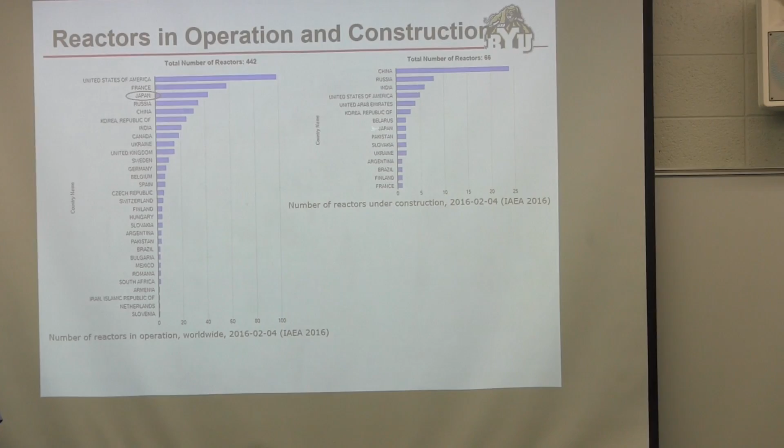This is being challenged in legal battles, and has been for a long time. But if Finland ends up having to foot the bill, it will bankrupt the utility in Finland, which would revert back to the government of Finland, which would probably bankrupt the government too. And if Areva ends up footing this bill, it will bankrupt Areva, which probably won't bankrupt France, but will have a huge negative impact on France. These are the things that make it so hard to get people to invest in stories like this, and there are lots of those that make it hard to invest in nuclear power.

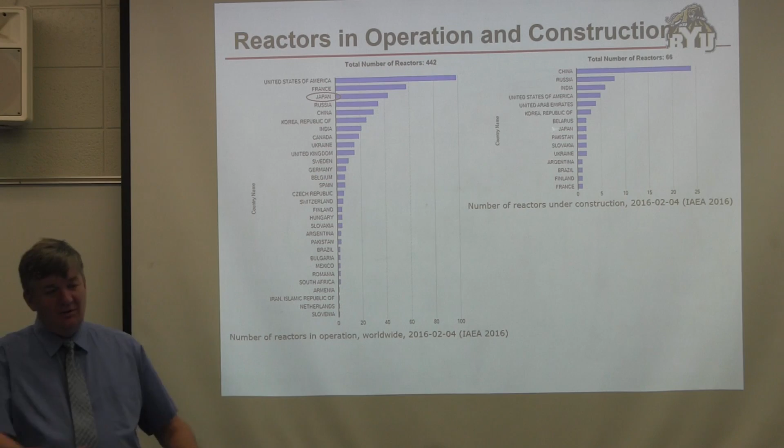So given this, who produces the most nuclear power in the world? Well, the U.S. This is the fraction of power produced from nuclear - in terms of fraction of electrical power, France produces the largest percentage from nuclear, almost 80% of their power comes from nuclear energy, so that's a lot. You can see how the rest of the countries come down here. There were a couple of countries where this was 100% for a while, but they closed those reactors.

These countries now have 0%. Where was Japan like 5 years ago? Japan was probably about second or third on this list, so it was a fairly significant amount of their power. That's why I circled here. Now it's down to nearly 0%.

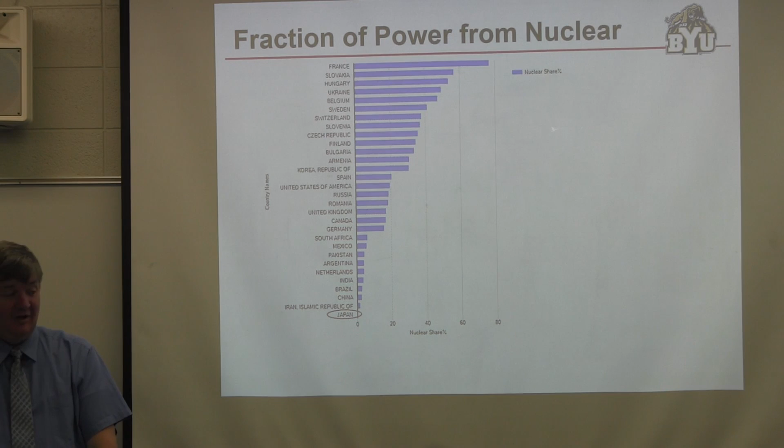So what's it going to? Down to coal, mainly. Well, basically everything they could find, but coal was the biggest contributor, and they're still struggling with that. They don't have a stable energy policy in Japan right now. Nobody believes they can continue what they're doing right now for very long. So they've got to either come to grips with restarting these nuclear reactors, which is very unpopular among the people in Japan, or convert to something else.

Now in terms of actual generation - this is suppressed - the U.S. on this scale is at 798, and France is at 419. That's so far out here that everything else would look like zero. So the U.S. generates nearly twice as much energy from nuclear power as France, and France generates about twice as much as Russia, and then everybody else follows as you can see here. So the U.S. is by far the largest generator of nuclear power in the world.

France has the largest percentage of nuclear power contributed to electricity. Russia is a large nuclear power contributor, and you can see where the rest of the countries fall in line. Japan - we circled them. This is the amount of nuclear generation in Japan.

I noticed China's building a lot of reactors - how long before they catch up to us? China's economy has been exploding for a long time, though it's slowed down to roughly 7% GDP growth right now. Compare that to the U.S. GDP growth, about 1.5%. So China's economy is growing at 7%, and they think they're in a crisis right now - and they probably are, frankly.

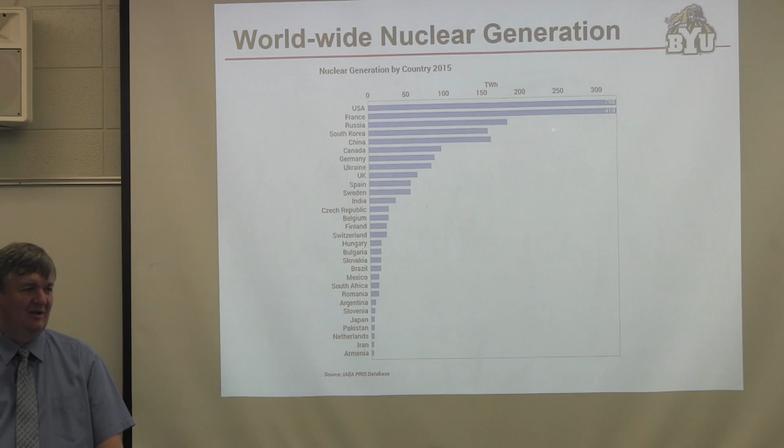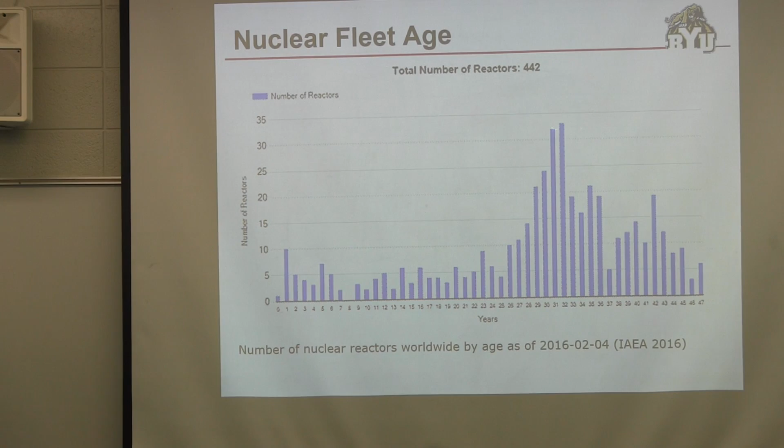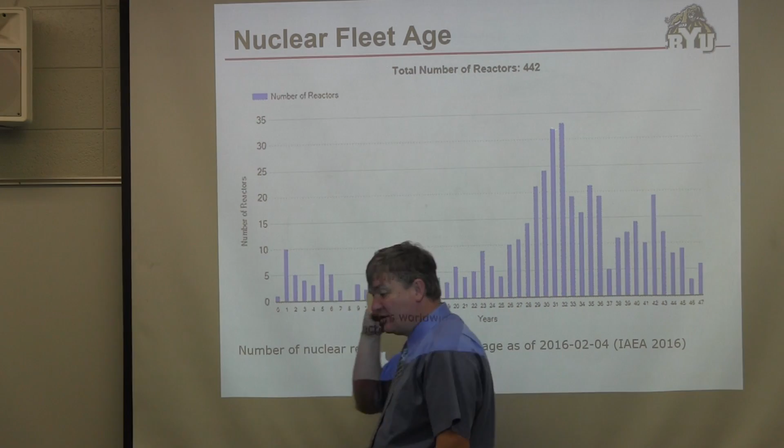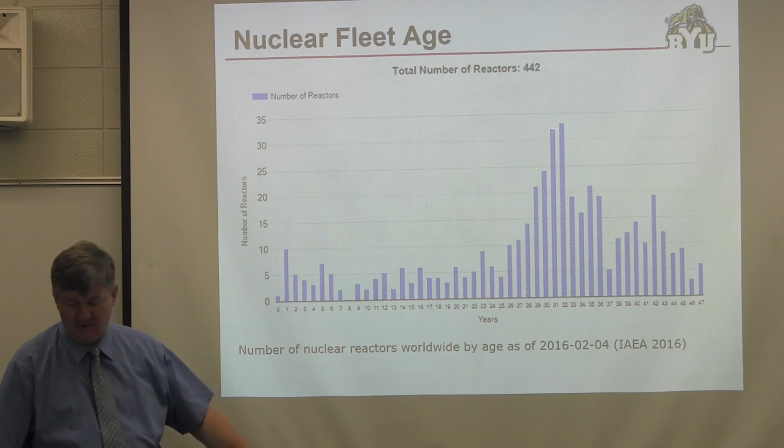So they're mostly 1970s technologies, designed in the 1970s, built in the late 70s and 80s, and up into the early 90s. There hasn't been zero construction since then, but worldwide there's been a lot less construction of new nuclear power plants since. Chernobyl was really what caused this, and Fukushima probably had a similar effect.

All right, so let's talk about how they work. First, some terminology. Fission is the dissociation of a nucleus into two unequally sized major fragments and a number of neutrons and some gamma rays typically. A fissile fuel is a fuel that fissions upon absorption of a neutron. All fission reactors have to have either fissile fuel or fertile fuel.

Nuclear power always comes from fissile fuel. Examples are uranium-235 or plutonium-239, the two most important examples. But there are some reactors—actually all reactors—that produce some fissile fuel from fertile fuel. So you put fertile fuel in them, and a fertile fuel is something that becomes fissile when it absorbs a neutron. So there's no fission event, but you absorb a neutron and convert U-238 to plutonium-239, and plutonium-239 then undergoes a fission event.

There are no such reactors in commercial operation right now, but thorium-232 is probably the next most important fertile fuel that people are thinking about using for nuclear power.

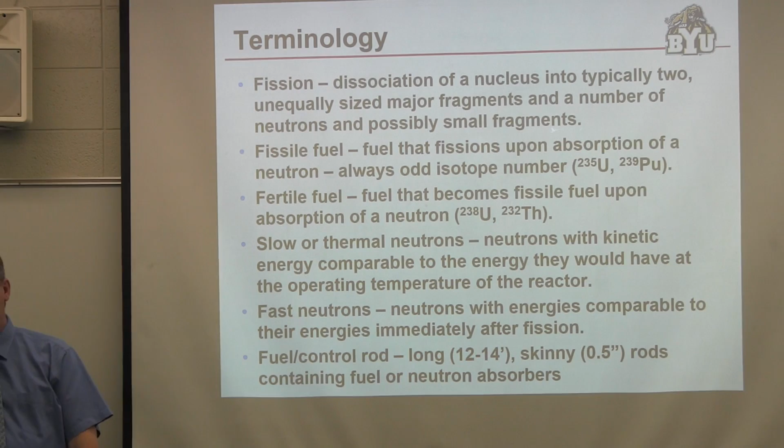When these nuclei come apart, we talked about how energetic it is. The fragments of the nucleus move at extremely high velocities, and the neutrons themselves move at very high velocities. They measure these velocities traditionally in electron volts, and a typical neutron from a fission will be what we call a fast neutron—it has a lot of energy, on the order of 1 to 3 mega electron volts. In extreme cases, they get up to 7 or 8, but those are rare neutrons.

And like many things in nuclear energy, everything is kind of backwards from what you usually understand. In normal chemical kinetics, it's the rapidly moving molecules that react. It turns out in nuclear power, it's the slow-moving neutrons that are most responsible for the reactions. In fact, the rapidly moving neutrons don't cause much to happen.

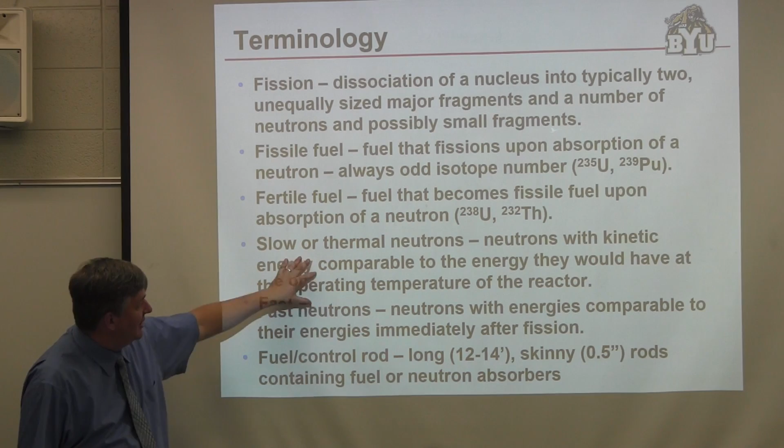So in a fission reactor—in a slow or thermal reactor, as they call them, which is most of the reactors we've built, almost all of them—what you have to do is slow those fast neutrons down so that they get to a little under 1 electron volt. So you're going from several mega electron volts down to less than 1 electron volt. Typically, 0.025 electron volts is the target you try to get them to. They call those thermal electrons, thermal neutrons, or slow neutrons. That's the level of energy they'd have if they were just bouncing around in equilibrium, bouncing off nuclei in the reactor, and that's where you try to get them to.

So the design of most reactors is to take the very fast neutrons that are initially generated and slow them down into slow neutrons. The thing that does that in the reactor is called a moderator. In most reactors, water is used as the moderator. So when you hear people say this is a water-moderated, water-cooled reactor, water is both cooling the core and also slowing down the neutrons.

The things you want to use for moderators tend to be very light things, but most importantly, they need to not absorb neutrons very effectively. You want neutrons to just bounce off the nuclei, exchange energy in that collision, but not be absorbed. That's the difference between heavy water and light water. Normal water, which has mostly hydrogen-1, has a higher absorption probability than heavy water. If you use heavy water, the likelihood of losing a neutron to absorption is much lower, so you don't lose as many neutrons. That means you don't need as many neutrons for the reactor to work, which is why you can use normal, natural uranium to fuel a reactor with heavy water.

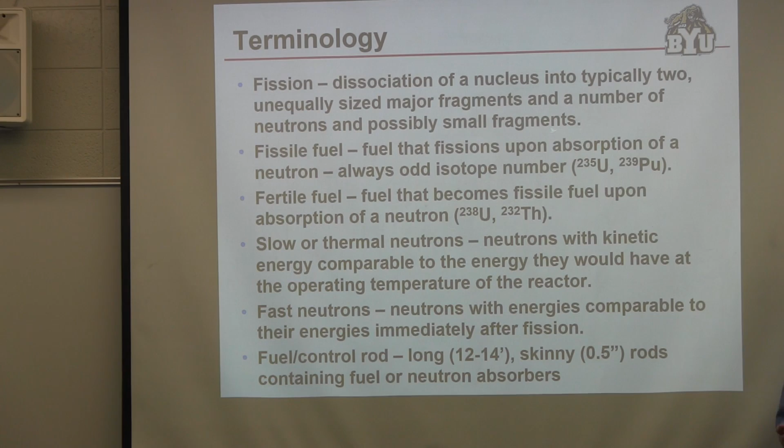Because you need a large surface area, since they get so hot inside that if you made them any bigger, they would melt in the core, and then you'd have a molten reactor, which is really bad from a safety standpoint. That's the worst thing you could do.

So you make them very thin, and one of your homework problems is going to be calculate the temperature profile on a typical fuel rod. You'll see they're typically about 1 centimeter, about half an inch in diameter, and across that 1 centimeter you go from several thousand degrees to just a few hundred degrees in a really steep temperature profile. So the fuel rods are really skinny.

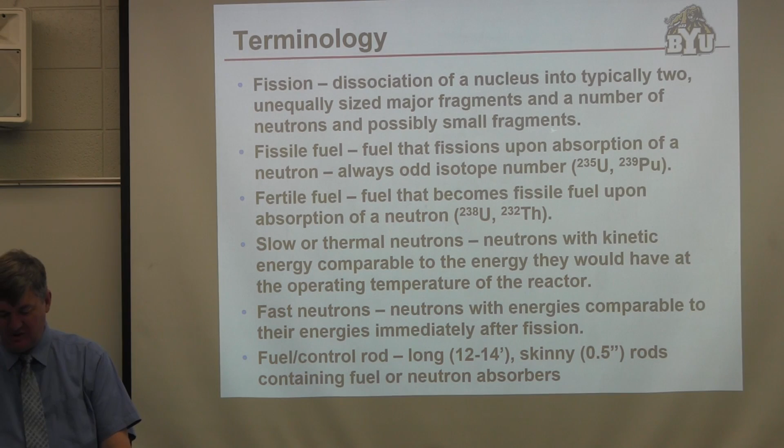The control rods are similarly skinny. They don't have to be skinny for the same reason. They're usually skinny because they go into the same kinds of holes that the fuel rods go into. They are actually sometimes a little bigger.

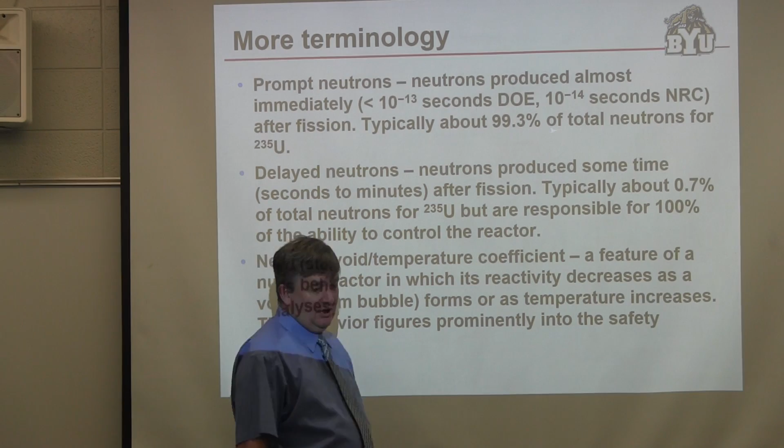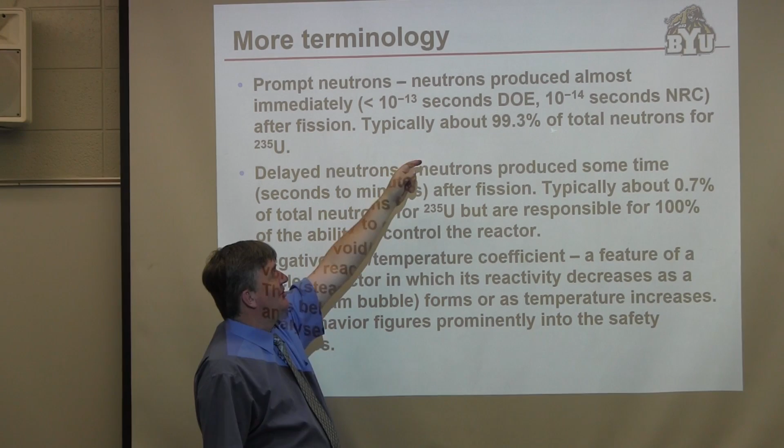When you generate these neutrons, you generate what they call prompt neutrons, and this is more than 99% of the neutrons, generated almost instantly. It turns out two different agencies of the government, both of whom have significant influence in the nuclear industry, have different definitions for what a prompt neutron is, but they're functionally about the same—essentially instantaneously generated neutrons. Neutrons generated in less than 10 to the negative 13 or 10 to the negative 14 seconds after the fission event are called prompt neutrons.

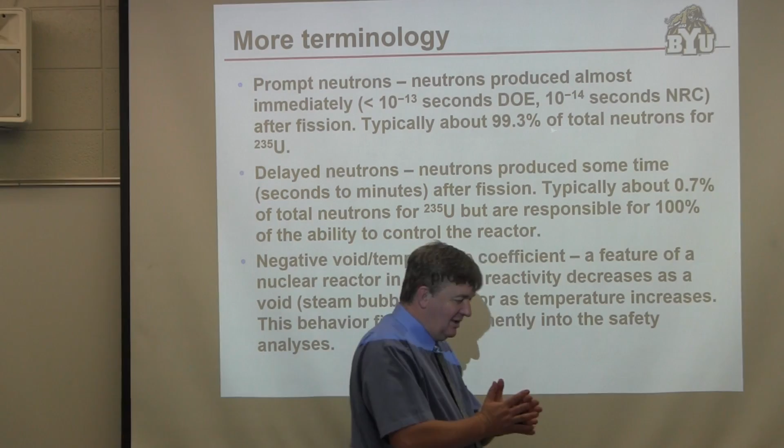So think about this for a minute. If I have this prompt neutron, I'm generating neutrons, and I've got this set up so I have a chain reaction, generating just as many neutrons as I need to keep it going at a steady state. What happens if I have just slightly too many, and they're being generated every 10 to the negative 13th or 10 to the negative 14th seconds? That means if I have slightly too many, that chain reaction, even if the reactivity ratio is like 1.000001, in one second you go through 10 to the 13th generations of accumulating neutrons.

So in less than a second, the reactivity of this reactor would just blow up—way faster than anybody could respond to try to turn the reactivity down. Or the other way, that's catastrophic. The other way isn't catastrophic, but it's still just as difficult on the reactor. If you don't have quite enough reactivity, the reactor just shuts itself down. Both of those things would happen effectively instantly, in terms of the time human beings can react to them.

Fortunately, there are delayed neutrons, and these represent less than 1%, typically 0.6 to 0.7% of all the neutrons. They aren't generated quite as quickly as the others—it takes seconds to minutes for these neutrons to be generated. Actually, the neutron generation itself is virtually instantaneous, but it occurs during beta emissions mainly. There are a few fission products that decay, and during their decay they generate more neutrons, but it takes a few seconds to maybe a minute for them to decay.

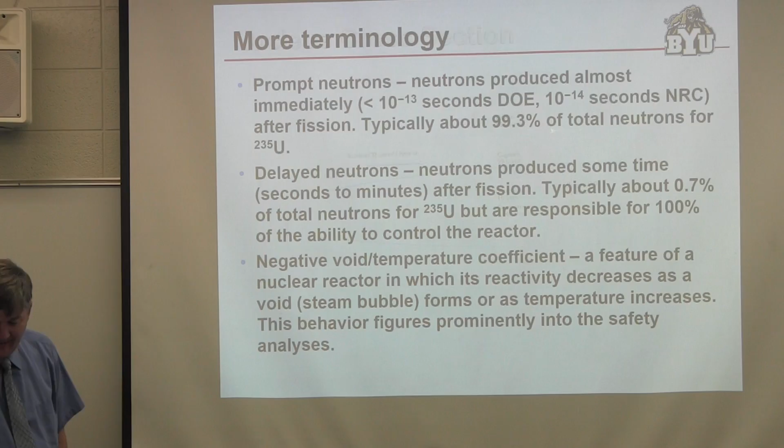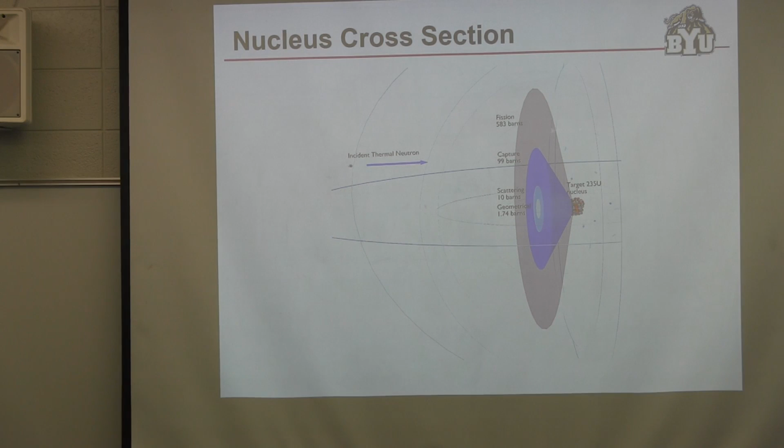So one more thing to talk about is the cross section. If this is a uranium-235 nucleus, we talk about cross sections—for absorption, for fission, for collisions, and for everything else. The cross section describes, from the standpoint of a neutron being absorbed, how big this nucleus looks. It's a measure of area, and the technical term for it is barns—like the side of a barn. Most nuclei are 1 to 2 barns in terms of their physical cross section.

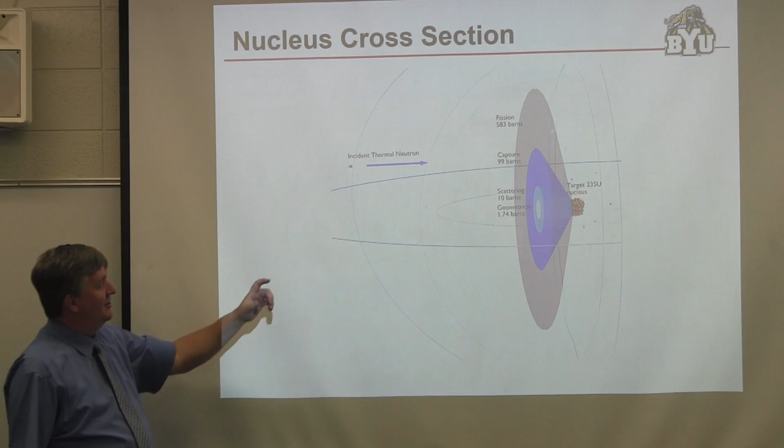But if an incident thermal neutron—a slow neutron—gets anywhere near this nucleus, it doesn't actually have to collide with it physically. The fission cross section is about 583 barns, which is a long ways away. If the neutron passes within that 583 barn target region around the nucleus, it causes the nucleus to fission. That's mind-boggling when you think about it: this neutron goes through here, far from the nucleus, and yet when it passes by, the nucleus fissions. That's part of the quantum mechanics of what's going on.

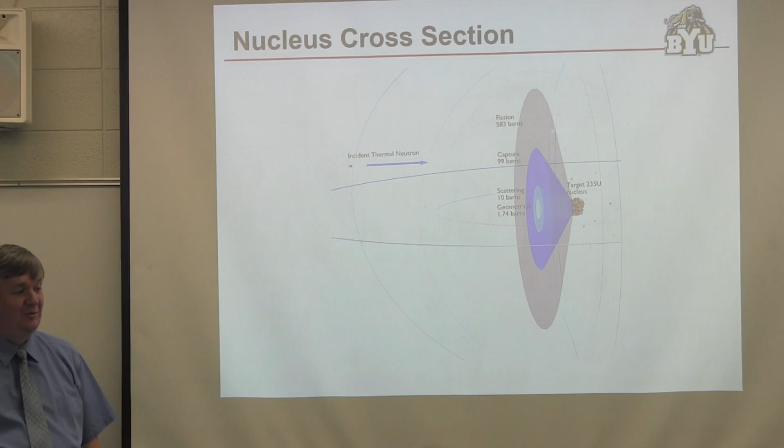Even though the nucleus has a physical size—about like this—it has an influence in terms of its wave behavior that's much larger, and it's so unstable that you don't have to get that close to it. If you think of this as a wave decaying as you move away from the center, the nucleus interacts with that wave far out here, and that's enough interaction to cause fission, even though geometrically they're still quite a large distance apart.

So this is how cross sections vary with the energy of the neutron. Notice this is a logarithmic scale covering 15 orders of magnitude—a huge range of variation. We start off at low energies, very low energies here.

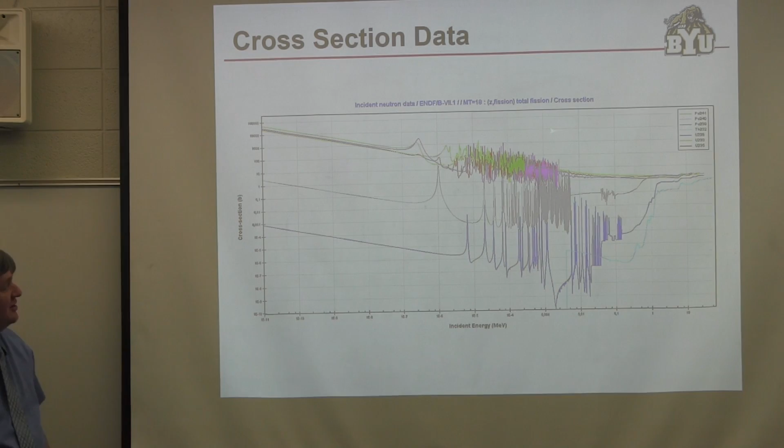We start with fission cross sections for uranium-235—the red line—plutonium-239 is the purple line, and uranium-233 is the green line. Those are all fissile materials, and at very low neutron energies their cross sections are over 10,000 barns. Remember, the physical diameter is only 1 to 2 barns, so you don't have to get very close to the nucleus to get it to fission.

But as the energy of the neutron increases, this decreases, and this may not look like much of a decrease, but these are orders of magnitude decrease. By the time we get up to the mega electron voltage, prompt neutrons are clear out here. So we are many orders of magnitude smaller in terms of the cross-section when these neutrons are moving rapidly than we are when they're slow.

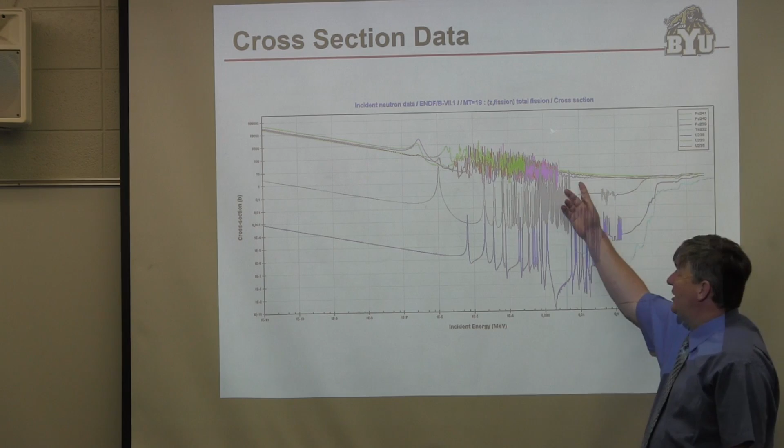So the design of slow reactors or thermal reactors is that neutrons are always going to be generated with energies that are out here, and we need some way to slow them down. As we slow them down, their likelihood of causing fission increases dramatically, and it's the slow neutrons that are actually driving the reaction in the system. So in reality, those neutrons spend most of their lives as slow neutrons.

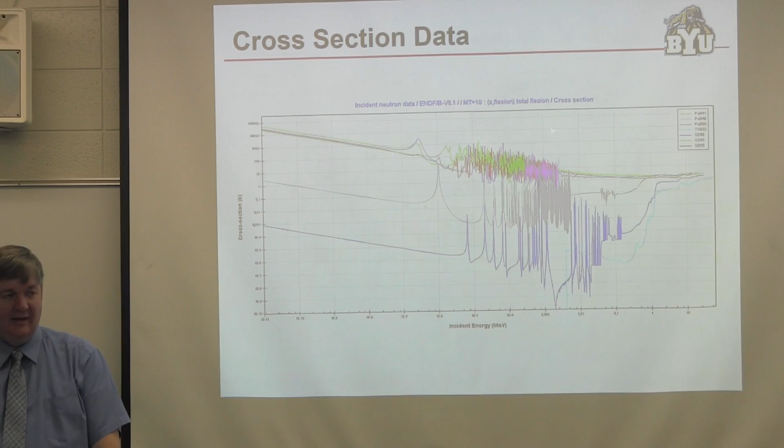This is a logarithmic plot, and this is a logarithmic plot. If you were to plot this on linear scales, this line would look like it would just come down like this and come out like this. So over the great majority of the lifetime of the neutron, it's actually moving slow. So we moderate - most reactors are under moderated.

So we have two kinds of reactors: thermal reactors, which is all but 2 of the 434 reactors we build, that operate on thermal neutrons, just the way I talked to you about. Fast reactors actually use those fast neutrons. They don't have any moderation. And so the cross-section of the fast neutrons is not 0.

And so they will actually fission the fissile material at high speeds. But that means you have to have more enriched material, because the effective size of those nuclei has shrunk way down, and the chances of it banging into something else and getting absorbed is increased significantly. So you lose a lot of neutrons to absorption instead of causing fission. So we usually try to get them down to well under 1 electron volt. They start off mostly at 1 to 3, sometimes up to 6 mega electron volts.

So fast reactors can be either breeder reactors or not breeder reactors. A fast reactor just means that you're using the fast neutrons. Almost always, if you build a fast reactor, you would make it a breeder reactor. So what a breeder reactor means is that it's generating more fissile fuel than it's consuming.

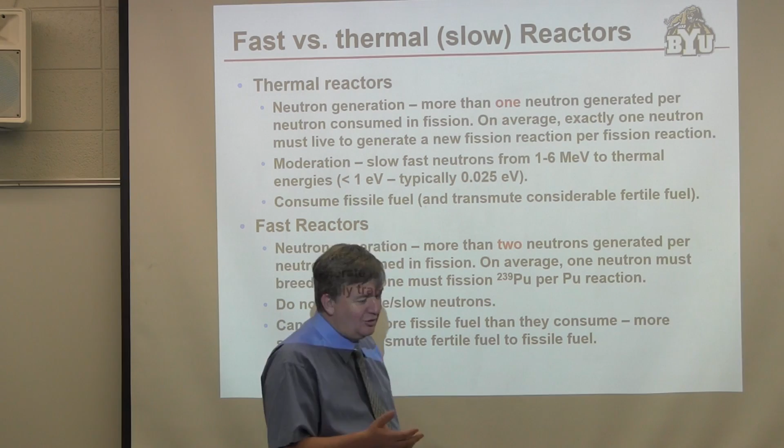So it's like an automobile that generates more gasoline. Now, you're consuming U-238 all the time, so it's not quite right - people say it makes more fuel than it consumes, and that's true in terms of the fissile fuel, but that's not true in terms of the fertile fuel. So you're burning up U-238, but you're creating more plutonium-239 than you're consuming, and over time, you have to take the material out periodically, take some of the plutonium out, put it back in the reactor, and it builds up more plutonium - you just keep making more and more fuel.

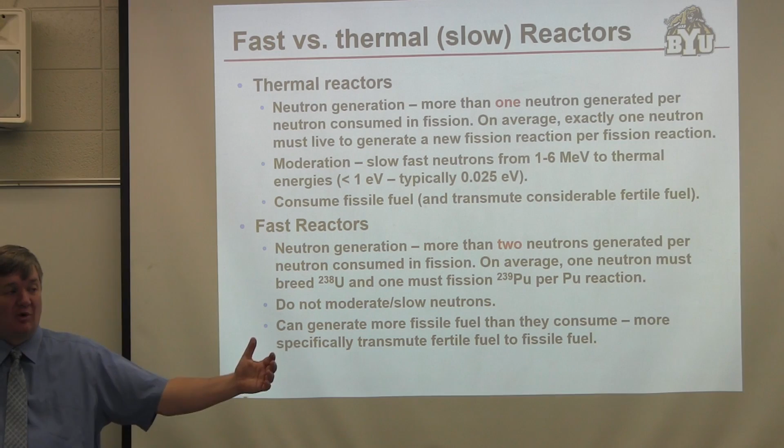So that means that instead of operating the reactors on the basis of U-235, which is only 0.7% of the uranium we have, we can now consume U-238 as well, which is 99.3% of the uranium. That makes the amount of fuel you need to generate a given amount of electricity way, way less. Or alternatively, that means we'd have way more fuel available to us for a much longer time than we would have otherwise.

So, with those terminologies, these are some of the parameters for different kinds of fuels. The vast majority of reactors are fueled with U-235, but mostly through weapons decommissioning, we have a bunch of plutonium. Plutonium goes into weapons, and so they mix that weapons plutonium with uranium oxide and make what they call MOX fuels - mixed oxide fuels, uranium and plutonium. But uranium is probably the place to focus here.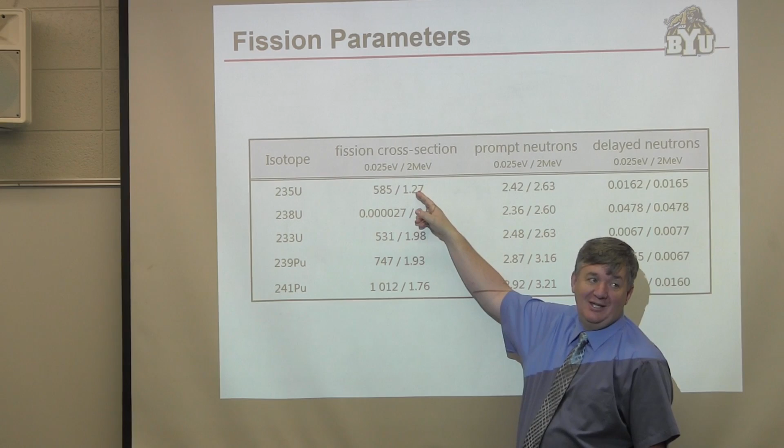So you can see the fission cross sections at energies of 0.025 electron volts - this is about 585 barns. That's only 1.27 barns at the fast neutron speed. So it's almost 500 times more likely to fission at slow speeds than it does at fast speeds. The number of prompt neutrons that you generate is a little over 2.

You only need 1 neutron to sustain this reactor, so you can afford to lose 1.4 of them to other things, in order to keep the 1 needed to keep driving the fission reaction. At high energies, you actually generate more prompt neutrons, and the delayed neutrons are a small fraction of that.

You can see the delayed neutron fractions there. You might think they're ignorable, but they are critically important to the operation of a safe reactor.

If you look at plutonium, it generates a little bit more. But now compare that to U-238, which is 99% of uranium. Look how much the cross section drops. You can fission U-238 both at low and at high speeds, but the fission cross sections are much lower. And you generate neutrons when you do that, and you actually generate more delayed neutrons.

So does that give you an idea? If you feel comfortable, you understand the science that's going on in the reactor? Because we're about to talk about the engineering of that.

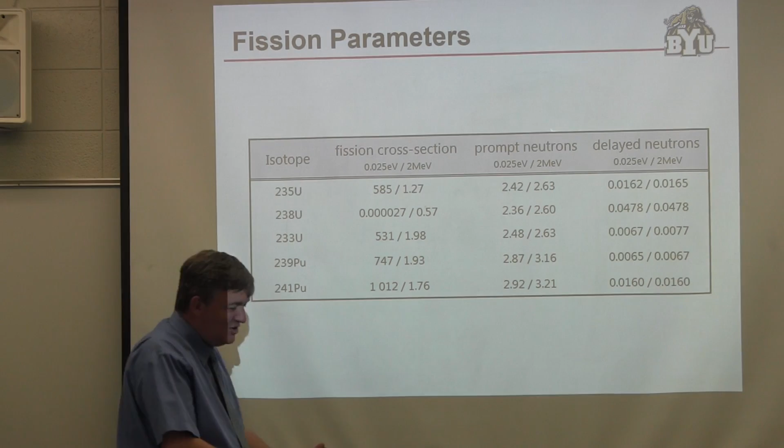Bottom line is, the reactor generates these very rapid neutrons. You have to slow them down, and there are several ways to slow them down. Then they'll react to produce more, and you have to keep the balance exactly right. So on average, even over a relatively short term, the reactivity—the ratio of the number of neutrons you're producing to the number you're consuming—has to be exactly 1.

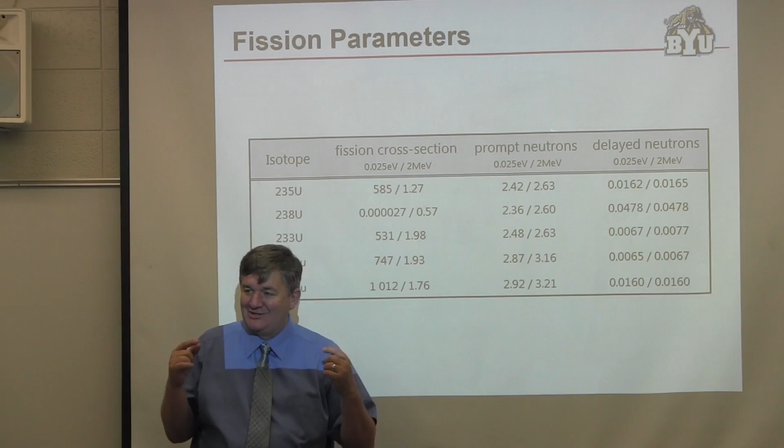The only way you can keep it exactly 1 is to be able to bounce up and down around 1 a little bit, and you do that with the delayed neutrons. They're the ones that give you the ability to respond in time so that you can keep the reactivity at 1.

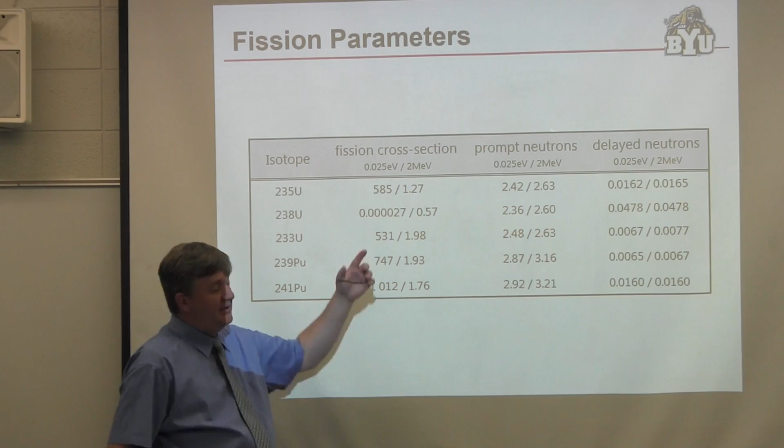So why exactly is the cross section so small for slow neutrons and U-238? The scientific reason is that U-235—it turns out that all fissile materials, this is just something interesting to know, have an odd number of nucleons. The U-235 is a huge atom.

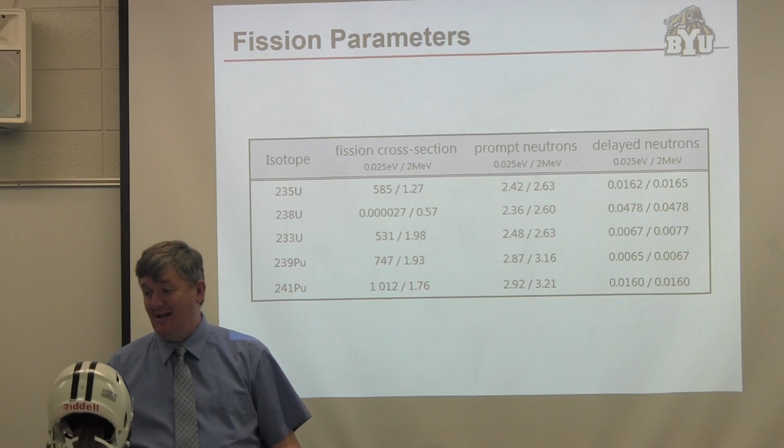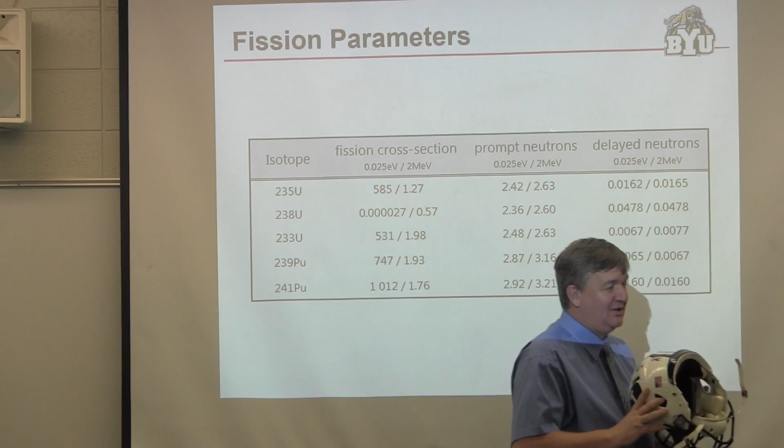All right, I'll answer this question, but it's another one. I'm afraid of what might happen to your head. Anybody who wants to wear one of these genuine, probably sweat-soaked BYU football helmets? How many times are you going to have a chance to do that? Just putting that on is a risk to your neck, right?

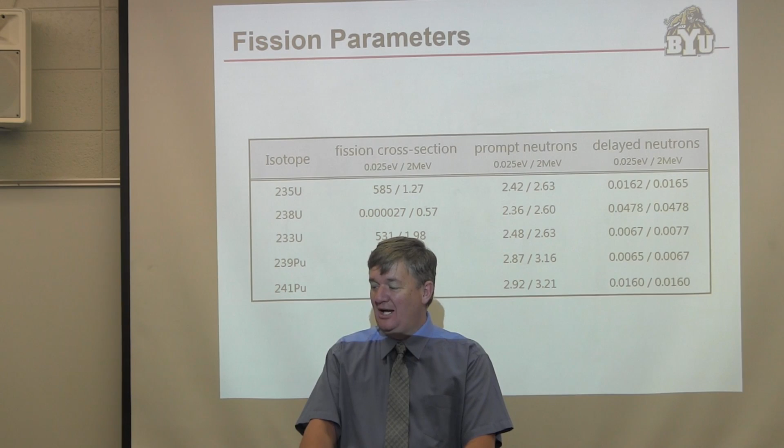All right, so what holds the nucleus together? That's the real answer to your question. So the thing that holds—what are protons and neutrons made out of? Quarks, all right? And they're each made out of 3 quarks. A proton has... quarks come in 6 varieties.

Anybody know the names of the quarks? Up, down—up, down, good. Those are by far the most important. Top, bottom, strange, and charm quarks, all right? So those are just names of quarks. They don't describe anything, they just give them those names, all right? They're not descriptive at all. So a proton has 2 up quarks and 1 down quark. A neutron has 2 down quarks and 1 up quark. And the quarks are held together with what we call the nuclear strong force.

So there's 4 forces in nature that describe everything: the strong force, the weak force, the electromagnetic force, and gravity. All right, so those four forces are the only forces we know of in the universe.

And of those, all the chemistry that you've learned outside of nuclear chemistry depends upon the electromagnetic force. The chemistry of everything that we do is the chemistry of electrons, not of nuclei. Every chemical reaction you think about is just electrons interchanging. The nuclei don't get involved at all, except in these nuclear reactions.

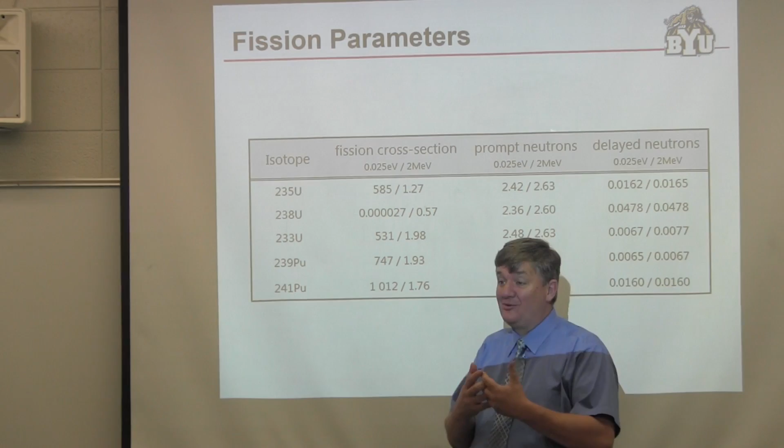A lot of people tell you what holds a nucleus together is the strong force. But it's really not the strong force. The strong force holds quarks together.

Just like in chemicals, molecules are held together by electromagnetic forces. But when we make molecules, there are always these local charge distributions. So what holds molecules together in a liquid is not the electromagnetic force of the chemical bonds - they're not chemical bonds between molecules. But because of those chemical bonds, there are these weak London forces, or hydrogen bonding, weak things that hold the molecules together.

Just like that, in the nucleus, the strong force has a residual strong force, leftover parts of the strong force holding things together. It's the residual strong force that holds the nucleus together. So when we talk about making energy, we're just talking about the residual strong force, which is a tiny fraction of the actual strong force. That's what holds the nucleus together, and that's what's responsible for the binding energies. But the residual strong force, unlike the strong force, decays very rapidly with distance.

As the nucleus gets bigger and bigger, the nucleons on one side of the nucleus no longer are attracted to the nucleons on the other side, and the nucleus tends to get less and less stable. U-235 is the only reasonably stable element we know of where the nucleus is right on the verge of just falling apart. So just like molecules are always vibrating, the nucleus is always vibrating, undulating, and it takes almost just a whisper of a perturbation on that nucleus to make it fall apart.

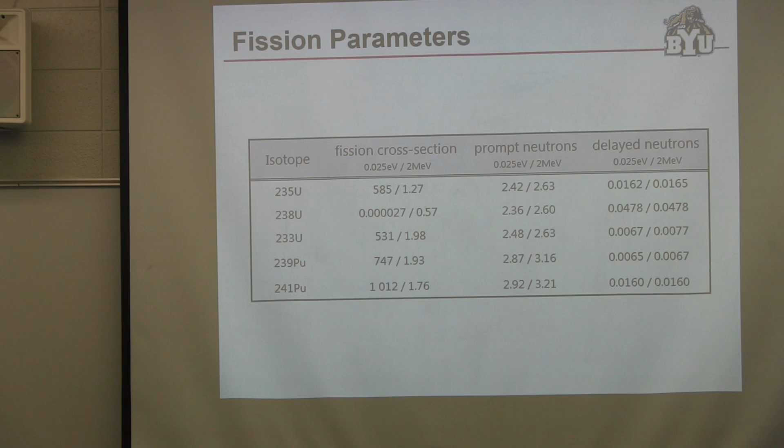U-238 is much more stable, even though it's bigger, because there are magic numbers of nuclei, just like there are magic numbers of electrons, and certain configurations of nucleons are more stable than others. For example, if you go from helium to lithium in a chemical system, helium is extremely stable and doesn't react with anything, while lithium violently reacts with just about anything that gets close to it. In a similar way, there are different configurations of nucleons that are more or less stable. U-238 is quite stable, but U-235 is just about to fall apart.

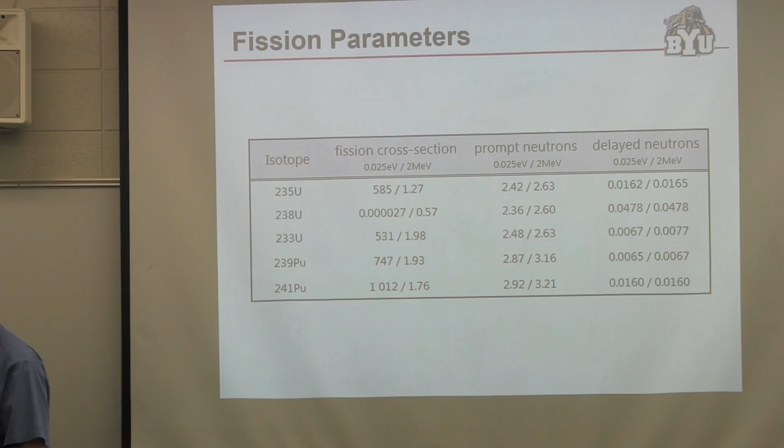It takes almost nothing to get U-235 to fall apart, but way more energy to get U-238 to fission. All of the elements heavier than lead, if you can get them apart, are actually happier once separated - that's what radioactive decay is all about. They all eventually want to become smaller things, but they're in a metastable state where it takes a lot of energy to get them over the hump. Once they do get over the hump, they're more stable as fragments than they were originally. But for U-235, that hump is very shallow, and it takes almost nothing to push it over.

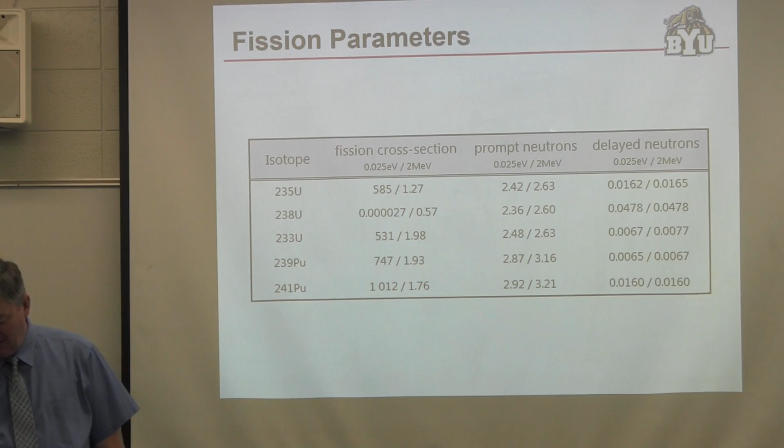So that's why the cross sections are so big. That was maybe a way longer answer than I wanted. All right, so let's talk about how these reactors work. In each case, I have a cartoon that talks about the essence of the reactor, and then a little better diagram.

The pressurized water reactor is by far the most common nuclear reactor. You have nuclear fuel, and you pump water through this nuclear fuel, and the water in this reactor is both a coolant and a moderator. The water slows down the neutrons, and because these neutrons move quite a long distance, they're generated in one fuel rod and almost always absorbed in a different fuel rod, where they cause the fission. So they move from one fuel rod to another.

The only time they can cause a fission within their same fuel rod is if they go through the very unusual event of doing a fast fission as a fast neutron, or if they bounce around in this water and, just by chance, the collisions turn them back around and they bounce back into the same fuel rod they came out of.

But more commonly they'll bounce into a separate fuel rod. So the water comes up through, keeps the reactor cool, and they never generate steam. And so, but you need steam to run the turbine.

So what you do is you pressurize this section of the reactor quite significantly so that you still have water at very high temperatures. And then in the steam generator, they call it, in another heat exchanger, you have water that comes through this heat exchanger, and you have other water that goes through here, and this second stream of water is not at as high a pressure as this one.

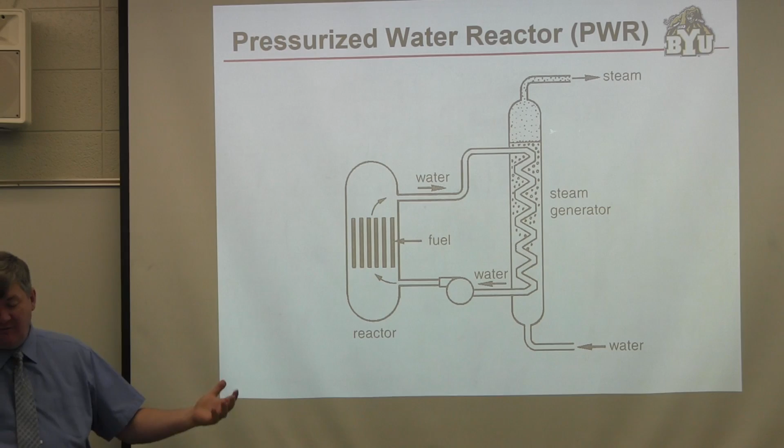But if you have radioactive water going through the steam turbine, and you have to do maintenance on steam turbines on a regular basis, that means the steam turbine is now radioactive. So now to do any kind of maintenance, and even during normal operation, the whole thing has to be shielded, and people that work on it have to be shielded. So it complicates everything else down here. Plus, if you ever have a leak or any accident in any part of this, if this is radioactive water, then that means the leak is going to cause radiation contamination of whatever is being leaked. So for all of those reasons, pressurized water reactors work this way.

So this is a little more detailed diagram of what a real pressurized water reactor kind of looks like. The inside of this containment vessel, they call it this big thick thing here, a containment vessel. So you have in here the nuclear core, where all the heat's being generated, the part we just looked at. And it turns out the steam generator, this is the steam generator, is usually bigger than the nuclear core. But that also goes inside here. So everything that potentially could be radioactive goes inside of here.

So what happens is, the temperature of this core changes depending on how much power you're generating. It doesn't change a lot, but it changes fairly significantly as you increase or decrease the power of the reactor. But if it's all liquid water, then...

What's the consequence of changing the temperature of the water? The density changes, the volume changes, and if you don't have anything for the water to expand into, it's the same as freezing water in a pipe. It'll rupture seals and pipes and everything else.

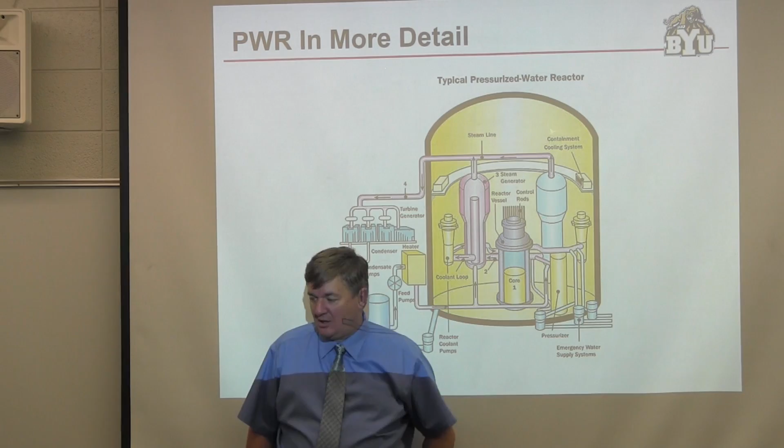So there it is. They also have in here what's called a pressurizer, and this is essential to the operation of one of these reactors. This pressurizer is approximately half full of water. And when the temperature increases, this gives it a place where it can expand into and decrease. And for this to be half full of water, though, what does that mean about the temperature of the pressurizer?

It's at the same pressure as the rest of the primary water, primary loop of the reactor, so it's got to be hotter. How do you make it hotter? Because the hottest part of this reactor is the core. You actually have to heat it, typically electrically, with electrical heaters inside here. So the hottest part of this loop is actually not in the core. The middle of the fuel rods is way hotter than the water, but the hottest water in this loop is not in the core of the reactor, it's in the pressurizer. You electrically heat that in order to have a little bit of gas phase.

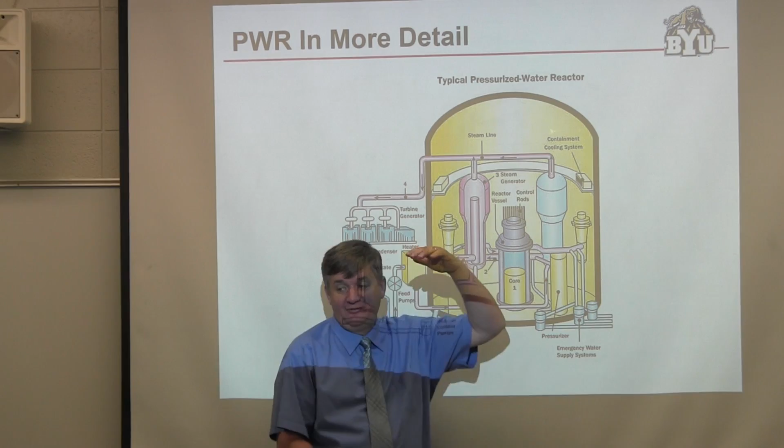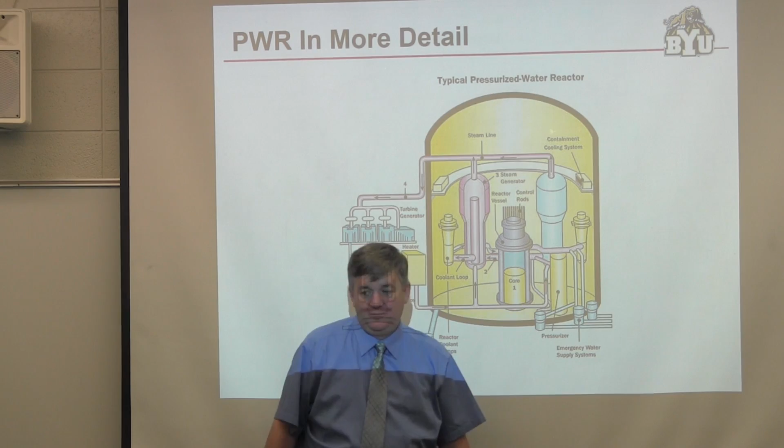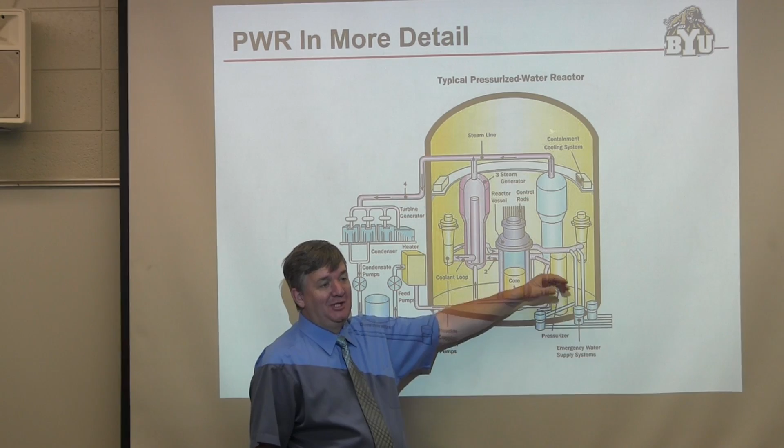So does it have to be at the saturation temperature then? It will be at saturation still, but there's two things you're trying to do. You generate enough volume of gas so that the liquid can expand and contract without a problem. The other thing is they use this for power surges. Because you have this gas in here, it can help pump water through. If you need a big boost of power, you can get it out of the pressurizer. So the pressurizer is kind of a mundane thing, just a stagnant, mostly stagnant pool of water with some steam above it, but it's critical to the operation of this thing. Somewhat non-intuitively, the water in the pressurizer is actually hotter than the water that comes out of the core of the reactor.

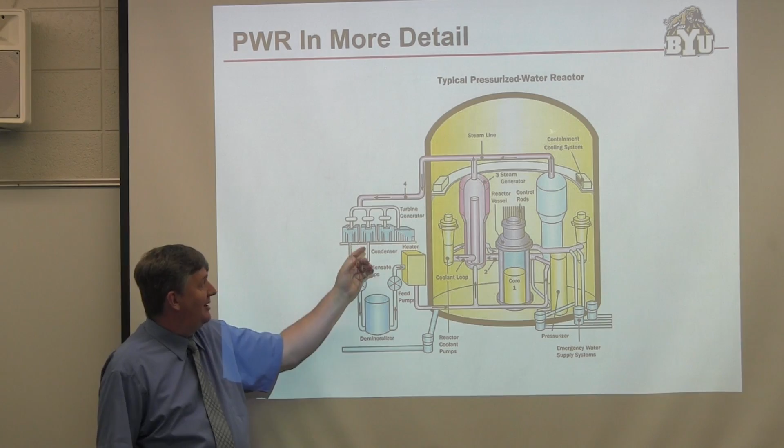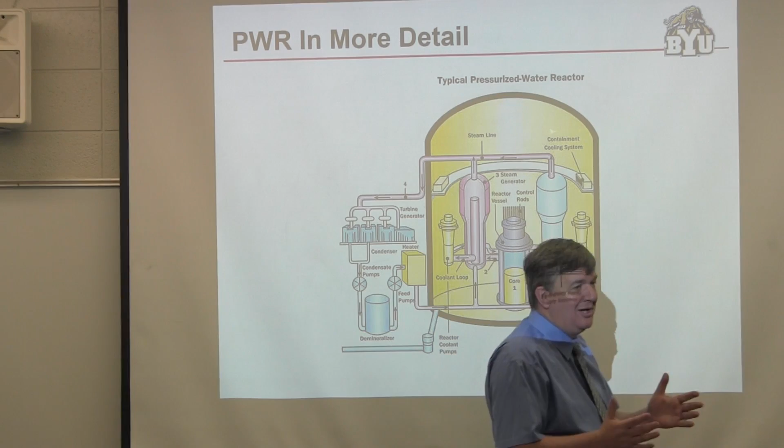So then all the steam turbine and everything is out here. The steam generator generates the steam that comes to the steam turbine, then that gets condensed, and this operates more or less the same way as a coal-fired power plant that we studied, with the exception that the steam coming in here is all saturated steam. It just comes right off that water, so it's all saturated steam, and the way they've drawn it here is pretty accurate. So what that means is you go through a few stages of the turbine until you condense typically 6 to 8% of the water, and then you take that water out of the turbine, continually extracting the water from the steam as you go through the stages.

So steam turbines are, in principle, in terms of what they do, very similar in coal-fired and nuclear reactors, but in detail they're quite different because they're fed with saturated steam in nuclear reactors, not superheated steam in normal reactors.

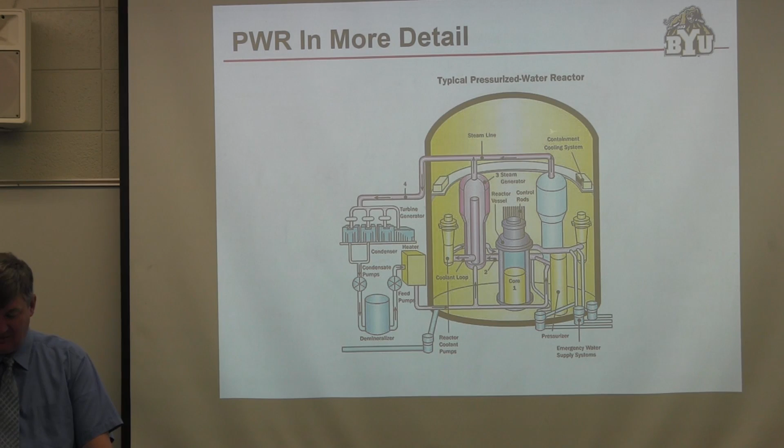So some of the features of a pressurized water reactor, the most widely used in the Western world and now worldwide, the most common technology that we have: the water never boils in the core. Never is probably in quotes, because occasionally you do get bubbles forming in there. They operate right at the edge of boiling, but they're designed not to boil. The heat is exchanged in the second low pressure loop, and it minimizes equipment exposure to ionizing radiation and radioactive waste production.

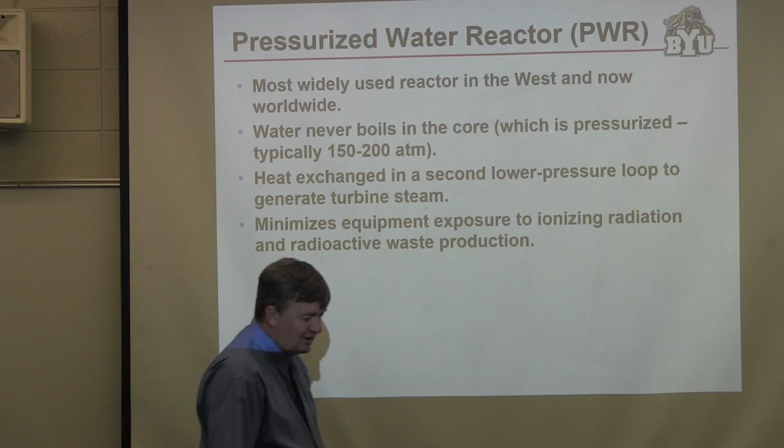So we'll talk about the boiling water reactor. We should probably take a break. Let's take a break, and then we'll talk about the other kinds of reactors.

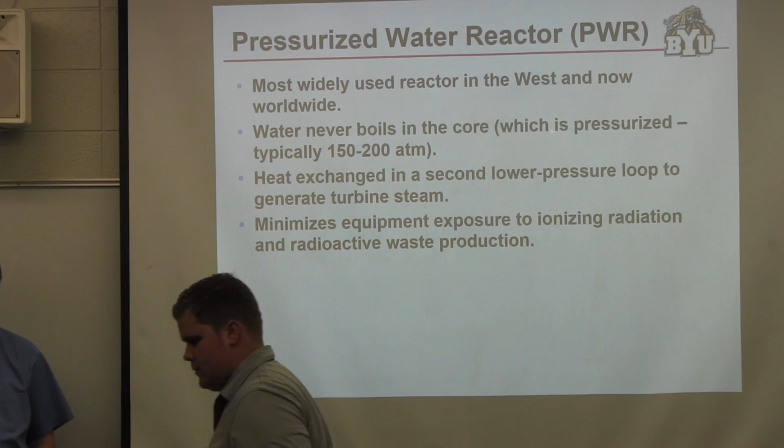...a positive void coefficient. So these kinds of reactors are cooled with gas. The advantage is you're not limited in temperature by water, so you can get a higher temperature here, which means you can generate higher temperature steam. The gas can be circulated at quite a high temperature. But gas isn't going to moderate anything, so they typically use graphite as a moderator. Carbon-12 in particular is an effective moderator, though most carbon includes small amounts of other isotopes of carbon.

Carbon-12 is the most common isotope. Carbon-12 has a very small neutron absorption coefficient, but the other isotopes have very high neutron absorption coefficients.

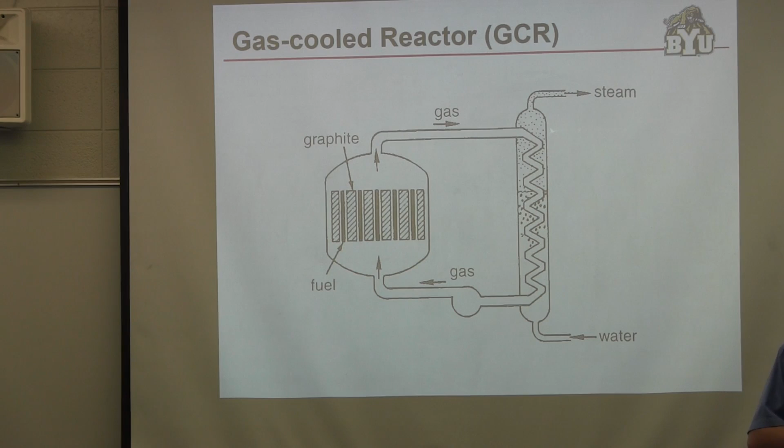This purity is essential. In fact, in the Nazi efforts to develop nuclear weapons, they failed because they didn't recognize how pure this carbon had to be. They were trying to moderate the reactor with carbon but didn't purify it enough. They absorbed a bunch of neutrons, lost patience with the program, and abandoned it, even though they were probably well ahead of the rest of the world developing nuclear weapons up until that point.

So the carbon has to be very pure, carbon-12. The carbon will moderate the neutrons. But unlike the water, as the temperature increases here, what's going to happen?

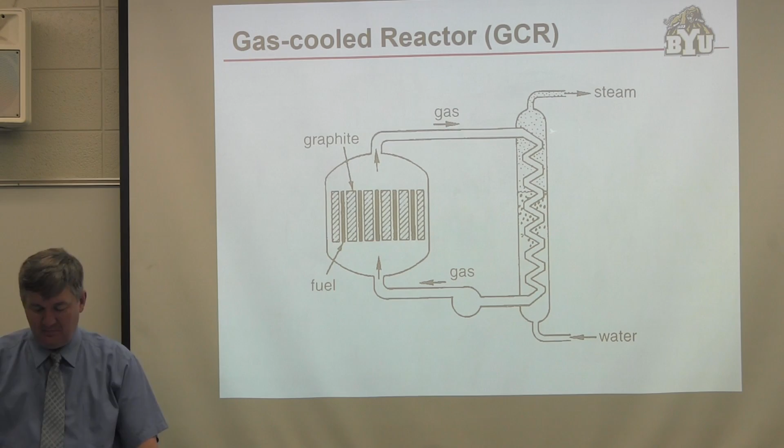You're not going to get the big drop in density that you do with liquid. So these kinds of reactors, depending upon other details of how they're built, graphite moderated reactors frequently have, at least over some regimes of their operation, positive void and positive temperature coefficients, which makes them problematic from a safety standpoint. But aside from that, it goes through the rest of the system.

The gas is usually either helium or carbon dioxide. Helium, because it has essentially zero cross-section for absorption, but carbon dioxide is more effective in the turbines, so carbon dioxide with carbon-12 is also often used.

Graphite is the moderator. Again, you don't need a pressure vessel. I think we've covered all of that.

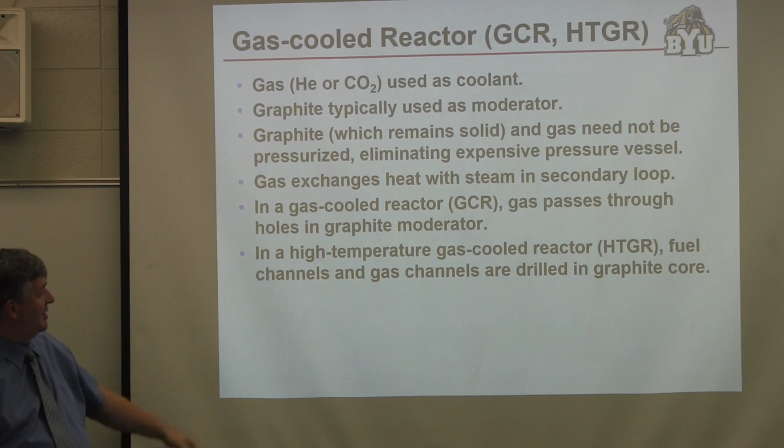So then we can get to breeder reactors and liquid metal cooled reactors. You probably talked in heat transfer about the very impressive thermal conductivities and heat capacities of liquid metals and salts. So you can use molten salts or liquid metals as coolants.

If you're trying to make a fast reactor, you don't want anything with a low atomic weight, because low atomic weight materials slow the neutrons down, and you don't want to slow the neutrons down. The reason they use liquid metals, typically sodium, is because a neutron can pass through sodium and hardly change its speed. It doesn't slow down appreciably as it bounces off the sodium nuclei, unlike other materials.

It might surprise you that the first liquid sodium breeder reactor that was built was put on a submarine. The second nuclear-powered submarine built, the Seawolf, was a breeder reactor with liquid sodium.

So who besides the military, you all know how sodium reacts with water, right? It reacts almost as violently in air. Metallic sodium will oxidize to sodium oxide just in air - you don't need moisture to do it. So who besides the military would put a whole bunch of liquid sodium in a submarine underwater, right?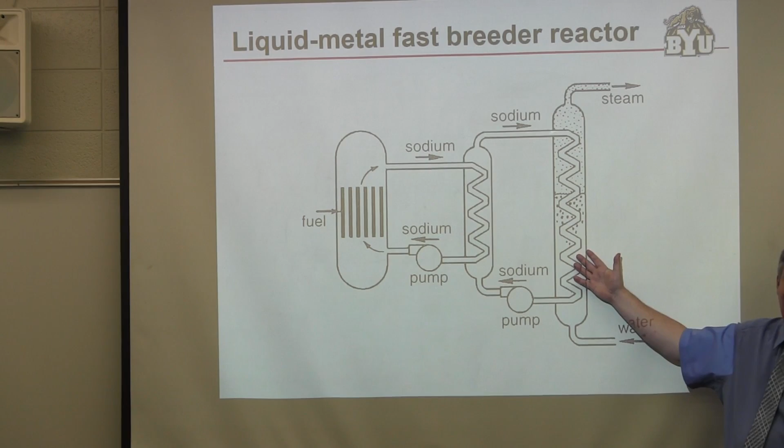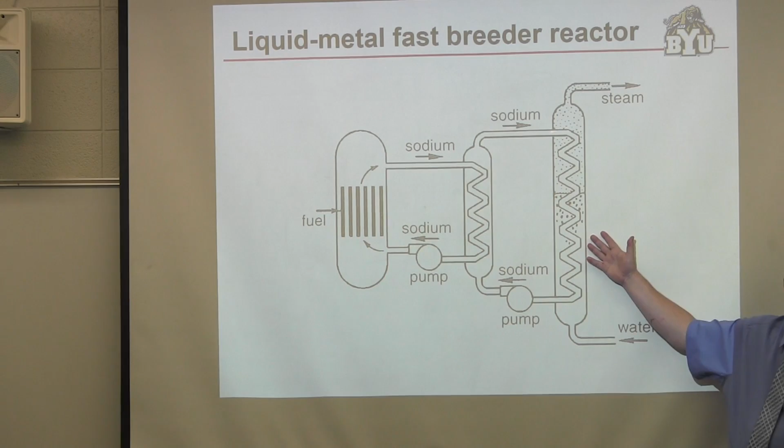The second sodium heat exchanger isolates the sodium-potassium coolant in the core from the steam turbine. Why do you have two heat exchangers here instead of one? The idea is that this heat exchanger is problematic because you have sodium on one side and water on the other, so there's a pretty good chance you're going to have a problem there - a major problem. And if you were to put that heat exchanger here instead, that major problem would become infinitely more complicated by the fact that the sodium is radioactive. So here you're dealing with non-radioactive sodium at least, but it's still a sodium-water reaction.

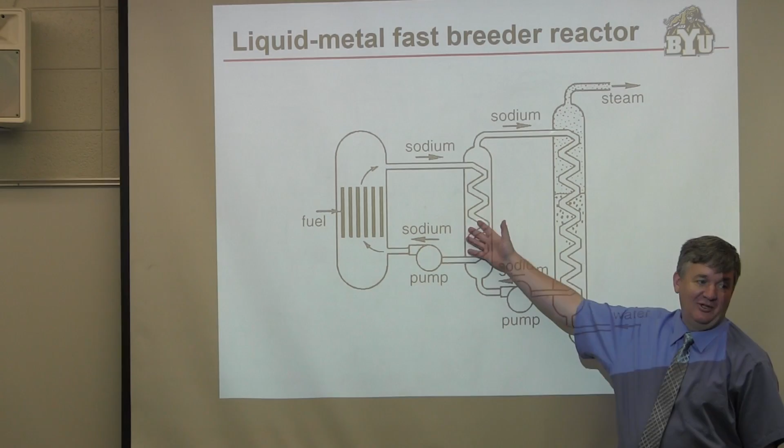So to prevent this problem from becoming almost impossible to deal with when it eventually happens, they put in two heat exchangers.

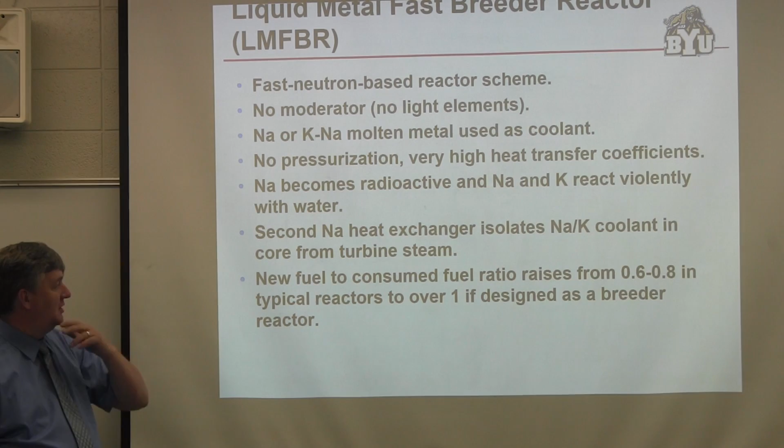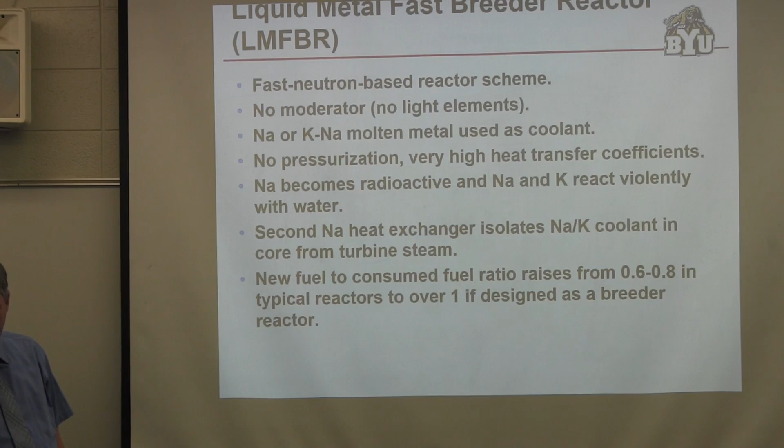So then we get to the light water graphite moderated reactor, a light water cooled, graphite moderated reactor. This is the design of the RBMK reactor, which is a Soviet design, and has actually a lot of technical advantages. This is the Chernobyl reactor, but there were a lot of things about it that were actually quite advantageous, though a couple of them were spectacularly bad.

So here it's just water cooled again, and now you have graphite moderation. Because it's water cooled, the reactor vessel, the tubes, still have to be pressurized, but the reactor vessel itself doesn't. Part of what that means is that because it's not pressurized, you can actually do maintenance on it in terms of replacing fuel, if you build this the right way so the fuel rod doesn't have to be inside a pressurized vessel.

So one of the advantages of this reactor is that you can actually do maintenance on it without shutting the reactor down. You can swap two fuel rods around while it's operating because you can pull the fuel rods out without depressurizing the reactor. So that's one advantage. It has a lot of other advantages as well.

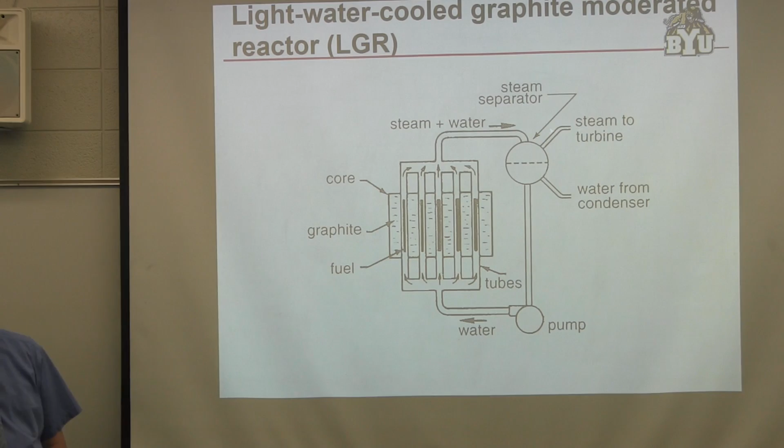The Soviet design standards didn't call for a containment vessel, which is a requirement in the Western world, and now a requirement worldwide, I think, to have a containment vessel around the core. The Chernobyl reactor did not have a containment vessel, and there were some details of the design here. We'll go through the accidents and talk about that a little bit more.

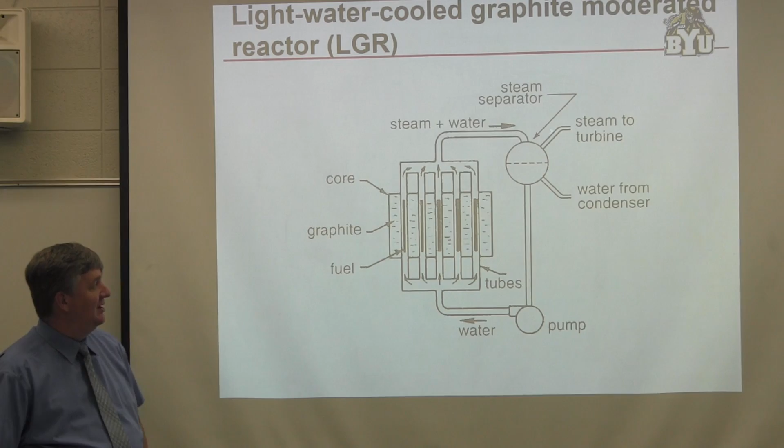So, the Soviet design is called the RBMK reactor. Fuel is in the pressurized fuel channel in the graphite block. Steam passes directly to the turbine. Fuel can be exchanged without reactor shutdown.

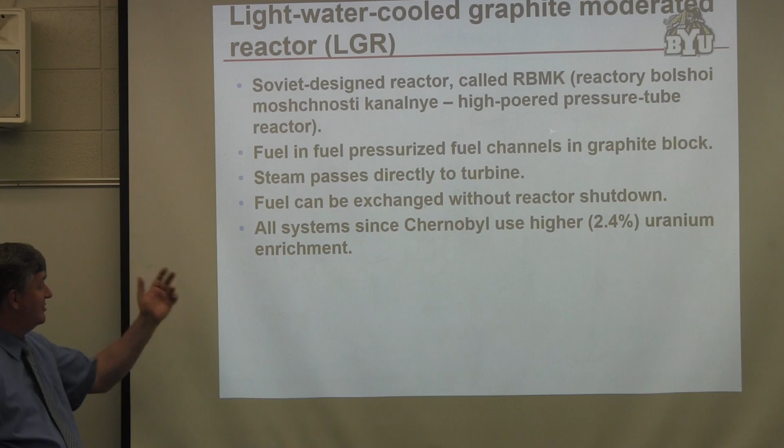So how long does it take those to decay back to things? And if you could extract the plutonium, how much difference does that make in terms of what you have to do to treat the fuel? We'll talk more about that, but this time it's mostly math, a differential equation kind of basis for the problem. Any questions about any of that? Do you feel like you can attack that?